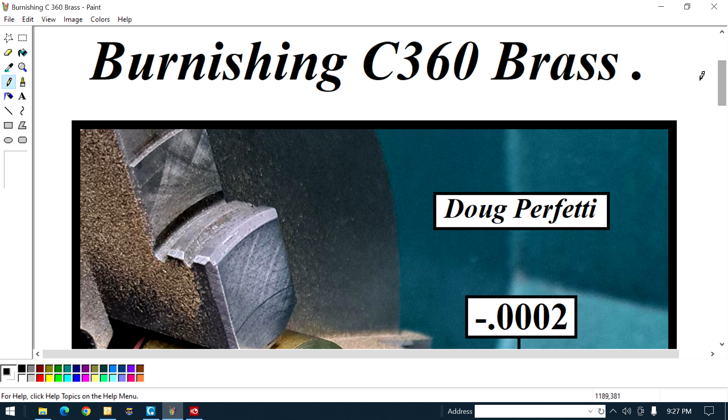As the day progressed, I got an awful big high because at the end of the day I got an email. See down here it says Doug Perfetti, the subject is Burnishing C360 brass. He sent me an email with some pictures, wound me right up. Was I excited?

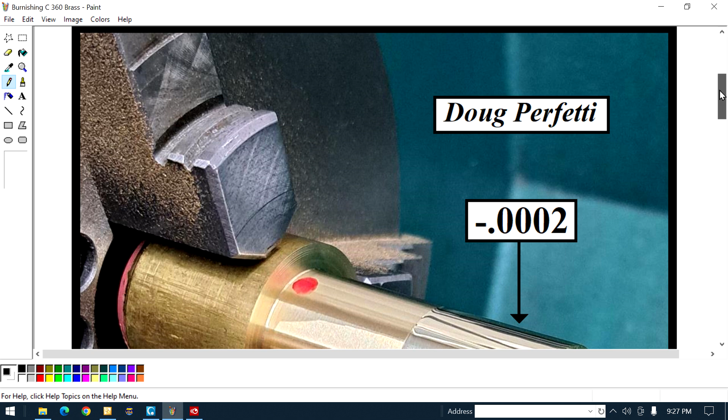You see this? It's Doug, Doug did this. He's one of my subscribers, he's teaching me a lot of shit. See what he's got here? You see that minus 2/10 of a thousand? That's the difference from this diameter to that - 2/10 of a thousand to get that finish. Isn't that sweet? Let me go down, I'll give you another angle.

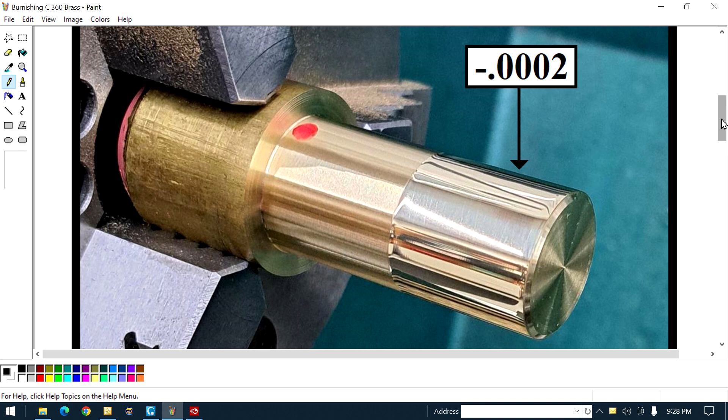Here's Doug again, you see it? Put a square on it - minus 2/10 of a thousand. I couldn't believe it, you know what I mean? And it excited me. I want to show you why I get excited.

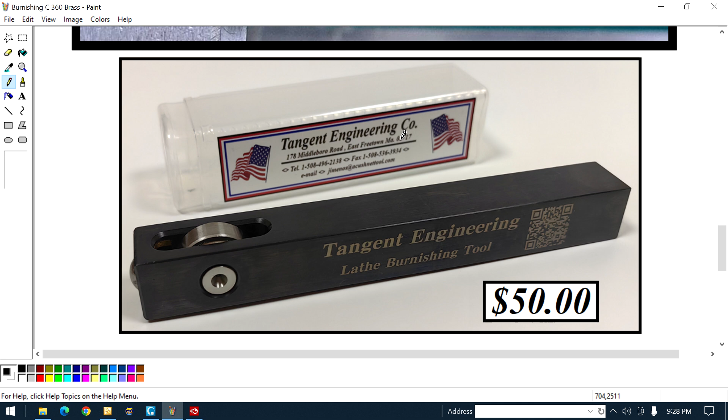But here's the thing that really gets to me. You see this thing? This is a lathe burnishing tool. You see the price? $50, right? Let me tell you something, I've been on this planet a long, long time. I worked in a couple of factories, I owned my own business. Ever since I was 14 years old I was standing vertical in front of a machine tool, making things in a machine shop.

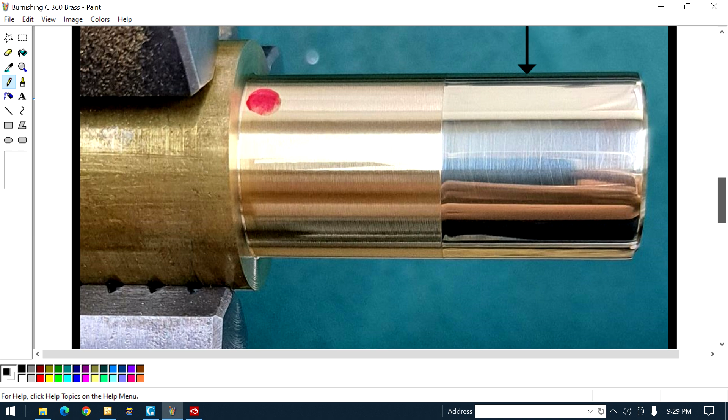I have never in my whole life seen a tool like this. See this? $50. For that $50 you can see there's a telescopic box that goes in - that's the burnishing tool, the black thing. For $50 you can do this, see that burnish? And you can put that sucker right in your toolbox. This thing is going to take on a life of its own. You try to buy a burnishing tool nowadays and you better find a mortgage department. This is chump change, and it's equal to the task.